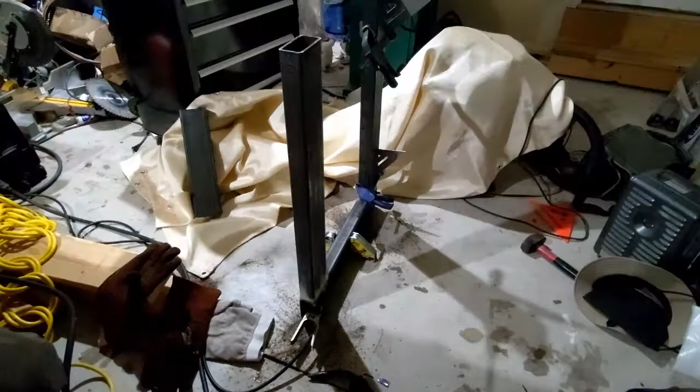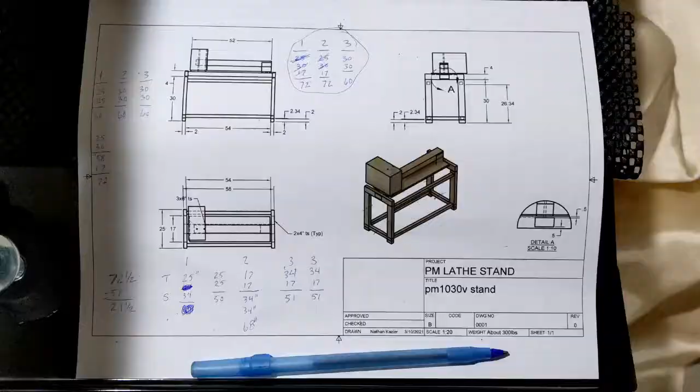Welcome to my shop, and today we are going to make a spanning beam lathe table. Hope you enjoy. So let's take a couple minutes and talk about the lathe stand itself.

I designed this in Fusion 360, and the overall dimensions for this lathe, which is the Precision Matthews 1030V stand, which is what we're working with, is about 54 inches. That includes the box. I asked a few comments online on some other videos and got some rough dimensions.

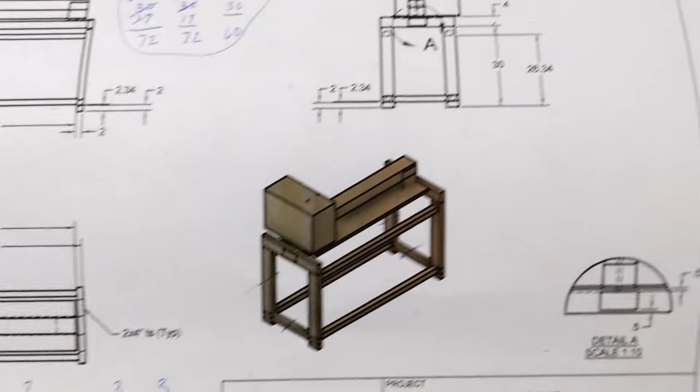Since the base of it is not really on Precision Matthews website, I couldn't find any of that info, but just wanted to give you guys an idea. About 34 inches tall. That will put the handle right about my elbow length if it's on the bottom of the beam that spans across.

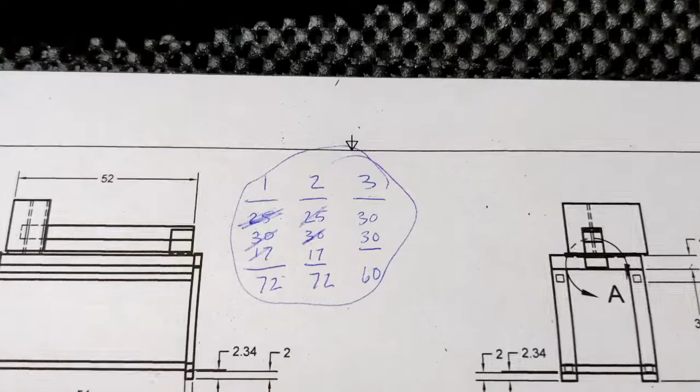So since I can't do math, I tried to do miter joints and couldn't figure it out, even though I could do it if I just flipped parts around and used 34 on a couple parts. So I highly recommend, if you are building this, go ahead and plan for miter joints. It's going to be a little bit stronger of a weld connection.

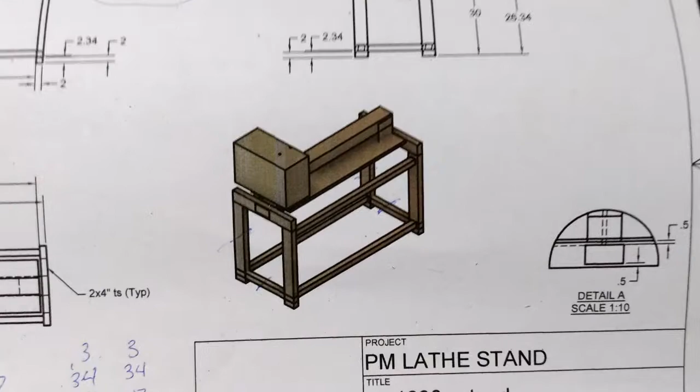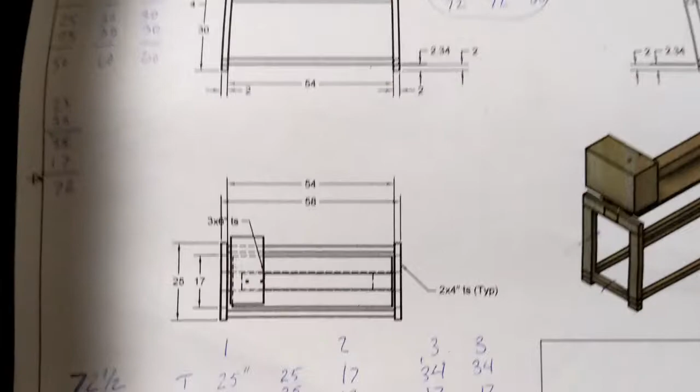This will work just fine because the load distribution is vertical from the stand down, so you're really looking at compression loading on these welds right in here. I used some 2x4 tube steel for the main frame, using a 3x6, and ran some quick calculations based upon these point loads coming from the feet on a fixed end connection type of support system. Hopefully we'll be able to get this figured out.

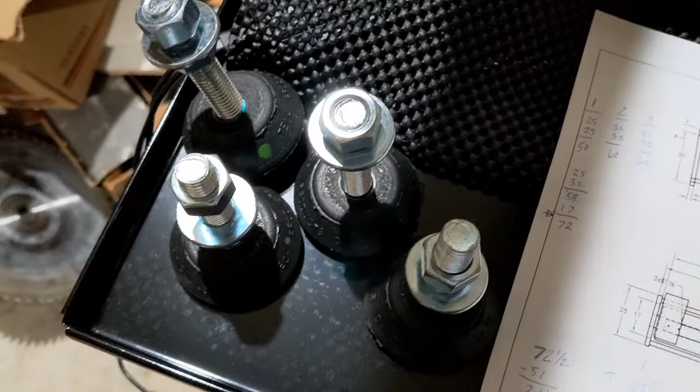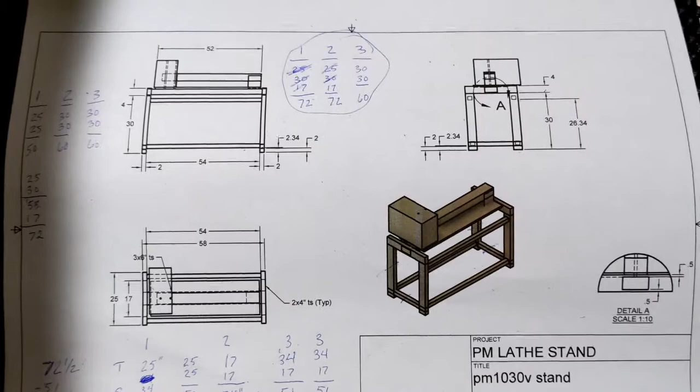I did buy these 300-pound rated stands from McMaster-Carr. These are medium rubber, just to give you an idea of what it looks like. Might upgrade these in the future depending on how much tool storage I end up putting in the bed itself, but might make that out of aluminum and put some drawer slides just to cut down on some of the weight. But anyway, follow along and we'll get the show on the road.

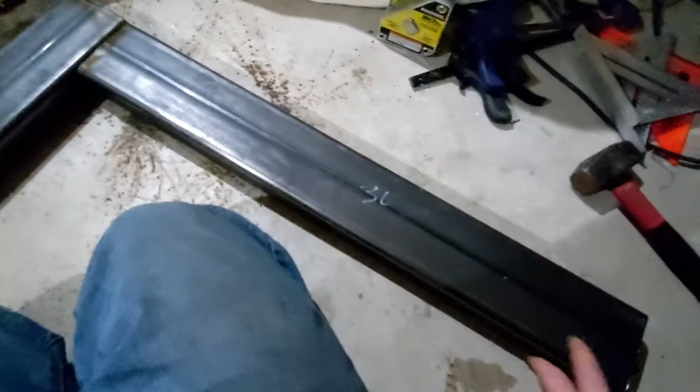25-inch cross member, going to weld that to this vertical. Highly recommend picking up one of these, or maybe a few of these - these magnets that you can turn on and off, which are great.

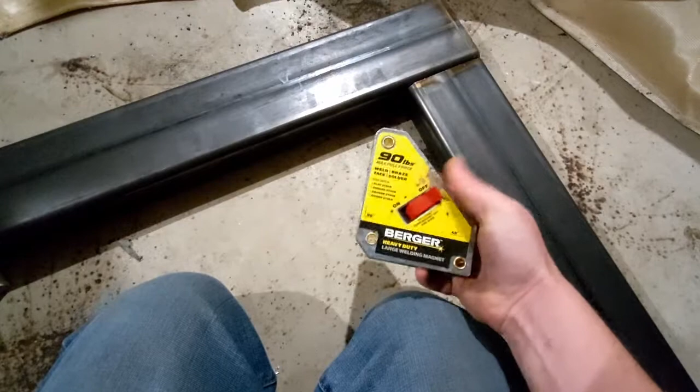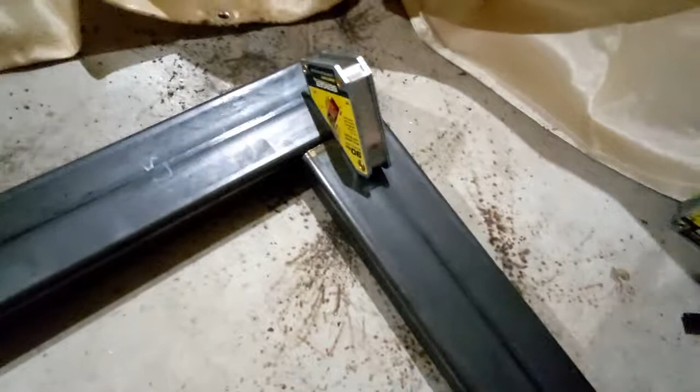So pick the longest side here. It's really hard to do this with one hand, but these magnets end up truing these two faces together, as well as putting one here in the corner, going ahead and truing up this.

Just going to place a couple tacks first, and then we'll flip it up on its end, take some measurements across, make sure it's square. That's the easiest way, and then fully weld it out after it's tacked in place.

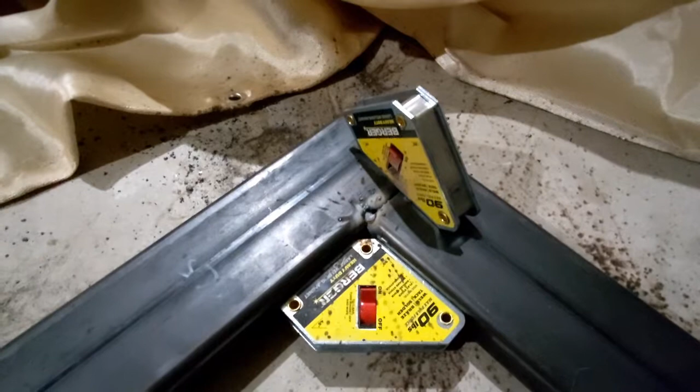Place a couple tacks just right up here in the corners. Should be more than enough. We'll do the other side and flip it up and start truing it together.

So once those are welded, I use those magnets to kind of hold this upright. And then what I'm going to do is take a measurement from the left side to the right side. So I put a square up as a reference, same down here, put another square up as a reference. Measure those two points, make sure they're aligned. And then take a diagonal measurement across the part, same as this side, take that diagonal.

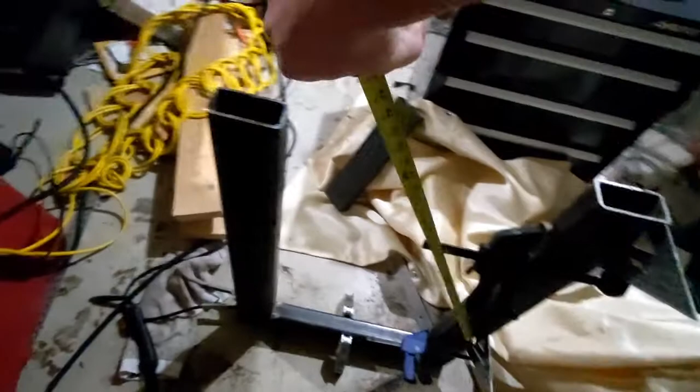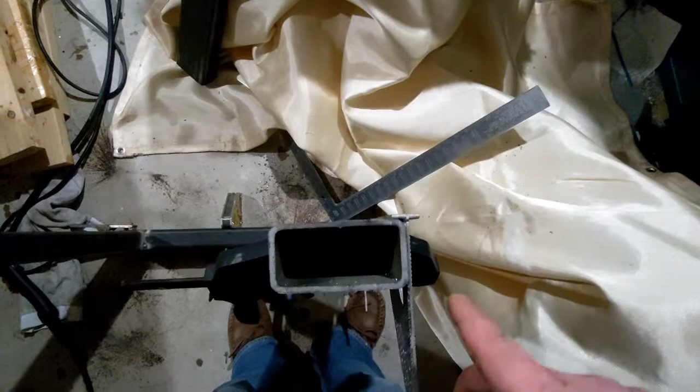That'll make sure that you're square. In order to figure out if you're plumb, perpendicularly, I'm using a regular carpenter square, making sure it's aligned as best as possible. Since these are all welded joints and all the load is coming downward, this isn't 100% critical, but we do want to tighten it up when we put the cross braces on.

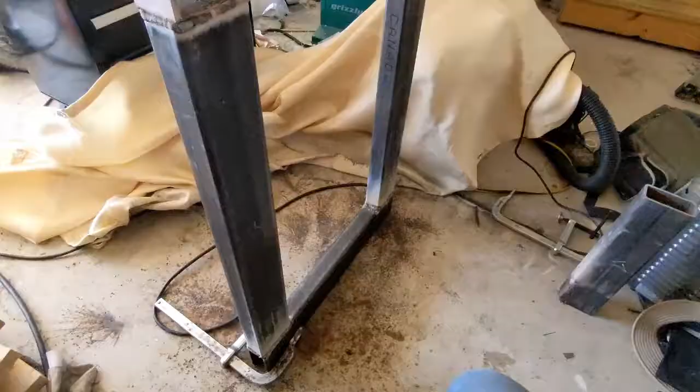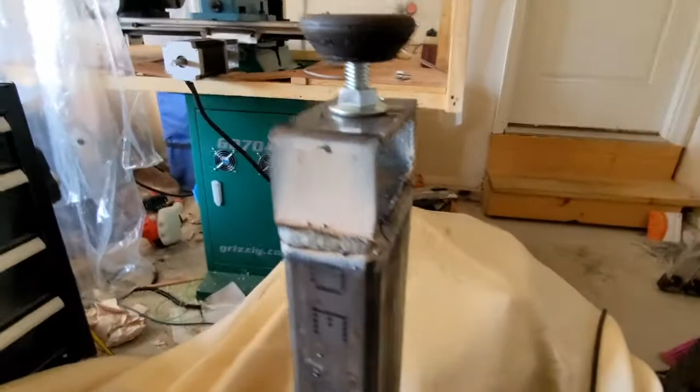So after we squared up the frame, we went ahead and welded on these extra pieces we had in order to have adjustability for the stand. All around weld for that, and that should be good. Worst case, I could always add some extra reinforcement plate to stiffen it up a bit more, but because it's such a slender object, it should be fine.

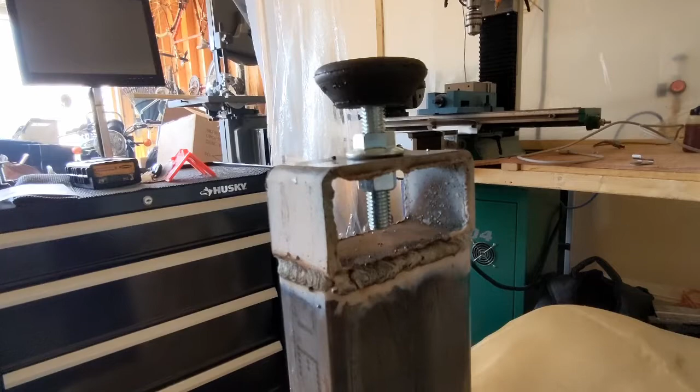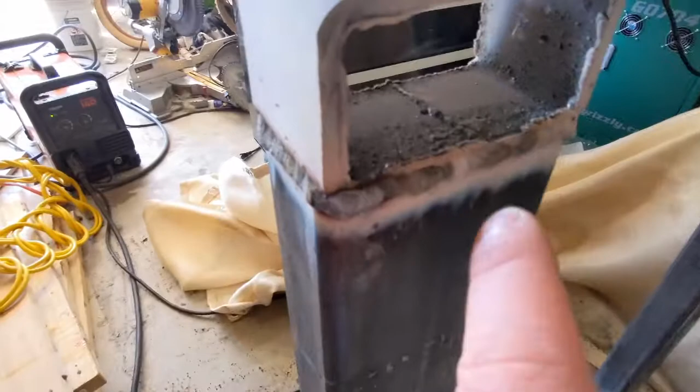One thing to note: when you weld this closed at the bottom with an all-around weld, you do need a vent hole. Just that tiny little vent will let it off-gas the inside of the tube, so don't forget that. You don't want this thing exploding, or when you get to the end of your weld, it won't seal and it'll just keep bubbling out because of the pressure. So put the vent hole in.

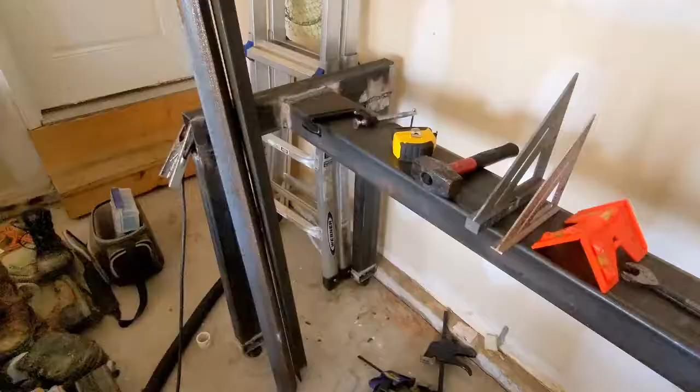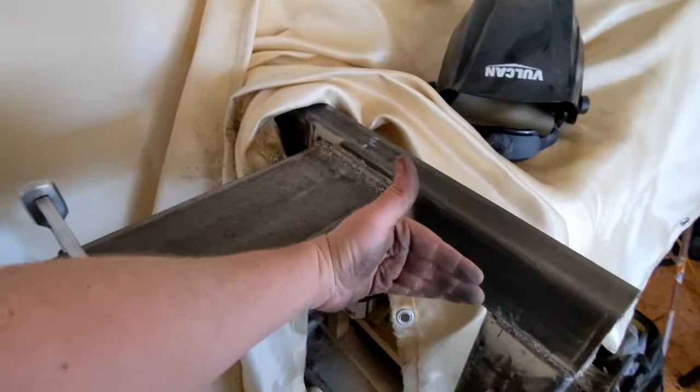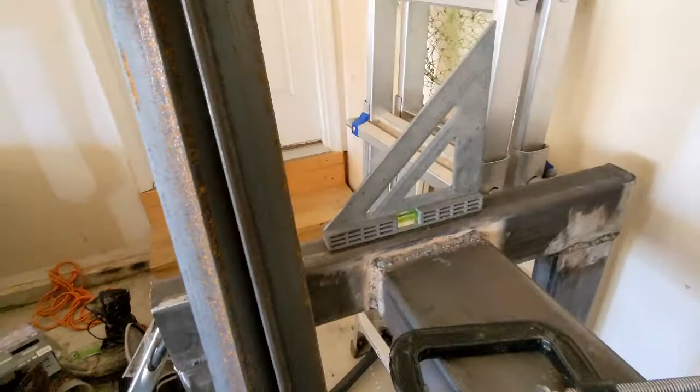Once you stand up the legs, I used pieces of angle going across and clamping it on both sides, then raised it to the correct height, checking for square this way from the beam to the leg, as well as that leg, and then set up a level. I know it's not a big one, but set up a level and true everything this way.

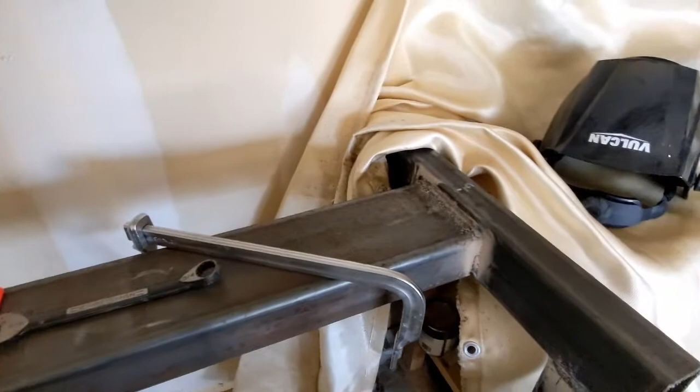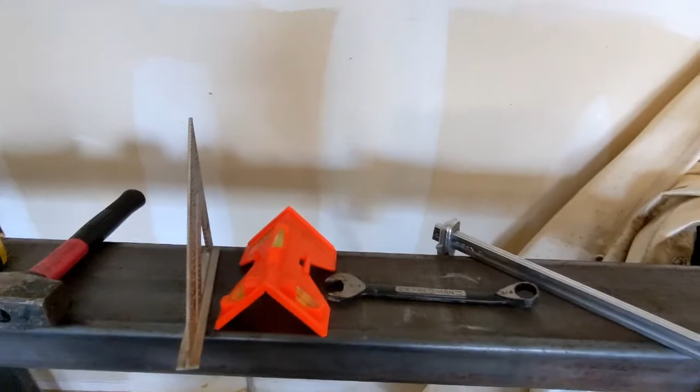Once you get there, you can do micro adjustments for where the lathe sits. The lathe will sit right here and another foot will sit over here. So we'll be able to shim it this way, as well as rotate each foot to get it to perfectly align. But if the lathe comes a little bit twisted, we'll be able to shim it directly under here and get the twist out of it.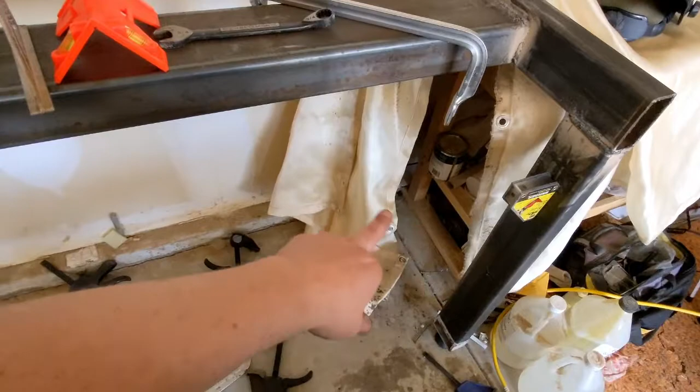Next is to take these angles and put an angle support going across. I still have to do the intermediate braces, but this thing is so stout as is that I don't know if we'll need to add that. Probably will throw it in since I already have them cut, and we'll just run some temporary bracing from left to right.

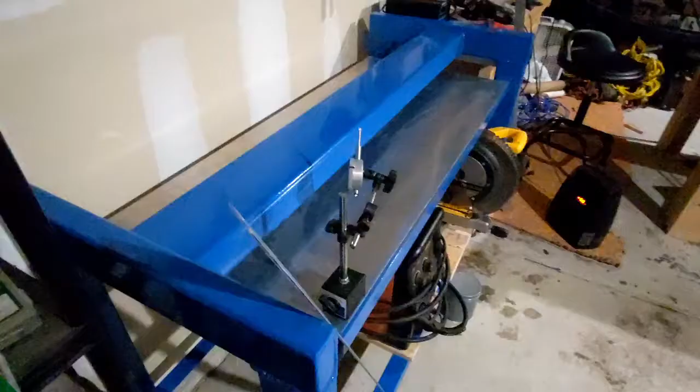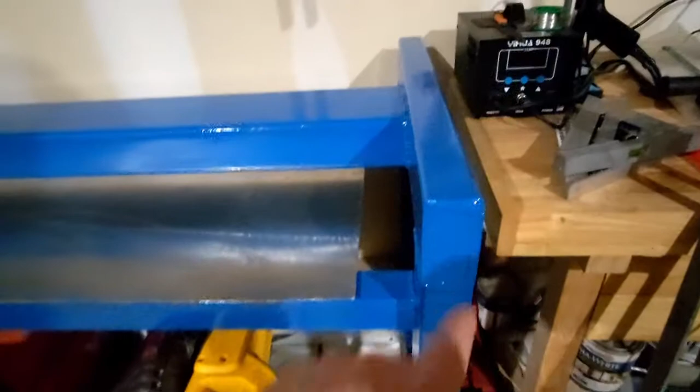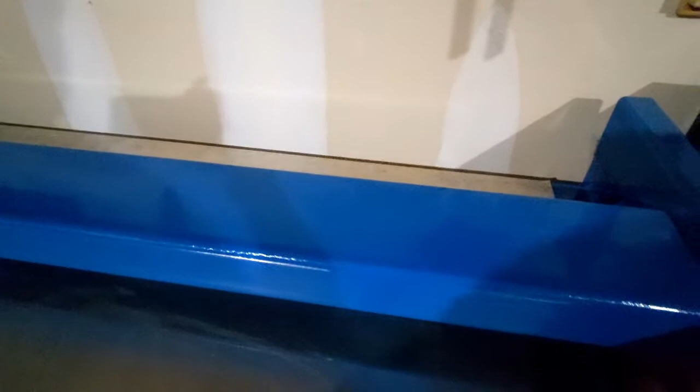Just want to do a final recap. I painted this safety blue just to give it some protection against rust, and also welded on some end caps right there. I did have to go back and resand the top surface - my roller actually had some fibers that got loose because the enamel paint is so thick.

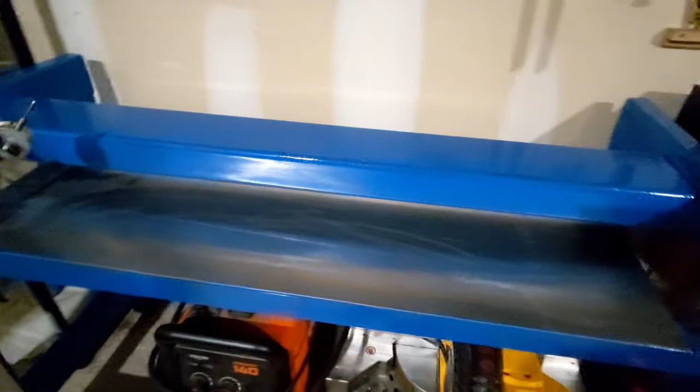Just wanted to show what it looked like after it was installed. Storage is just temporary for that stuff, but eventually I'll put some drawer slides on it, as well as some type of coolant catch system. When I get the drip pan for the lathe, it will help design that system to run flood coolant and be able to catch it and then recycle it. So anyway, here is the final lathe stand, and thanks for watching.